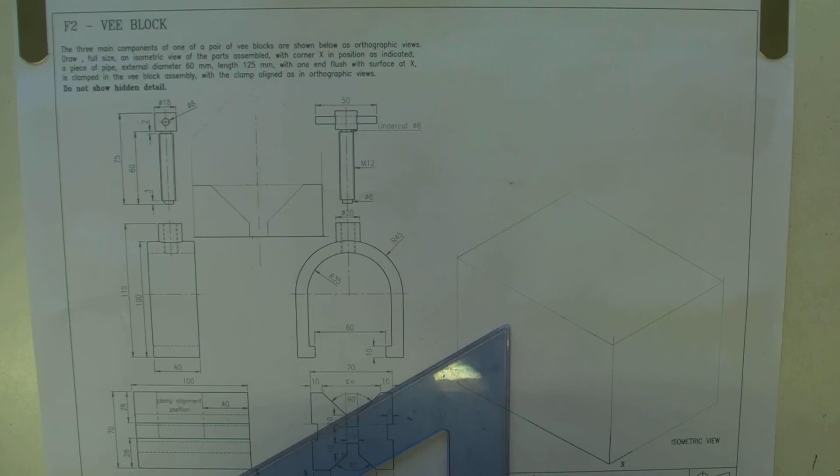Okay, so we've got the basic shape up. Next thing we're going to do is just draw in the profile here.

Now, because I've drawn this here, I can actually lift a few sizes from it, which makes a lot of sense to do. So I'm going to do that and just basically mark these on the side.

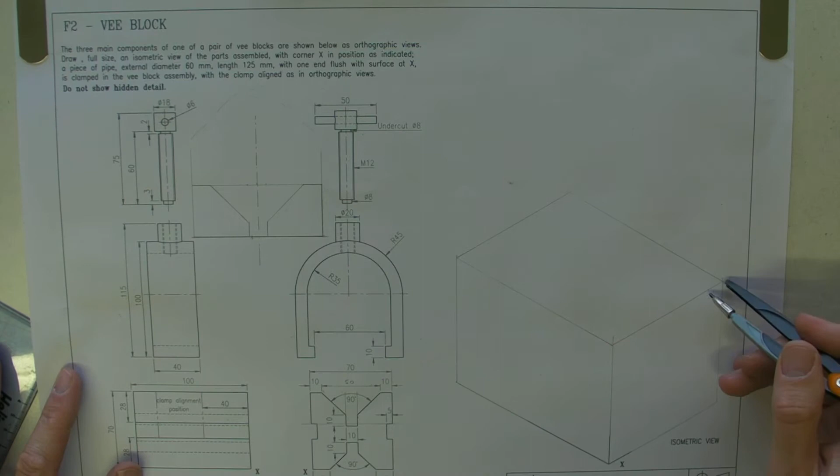So it's symmetrical, so mark that point there, mark that point there. I can mark how far down it is, measure there, mark that on.

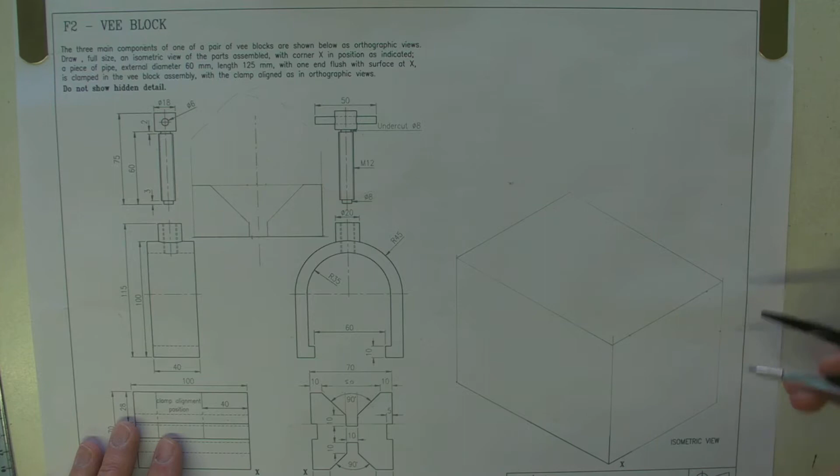And then we'll build this up as we go along.

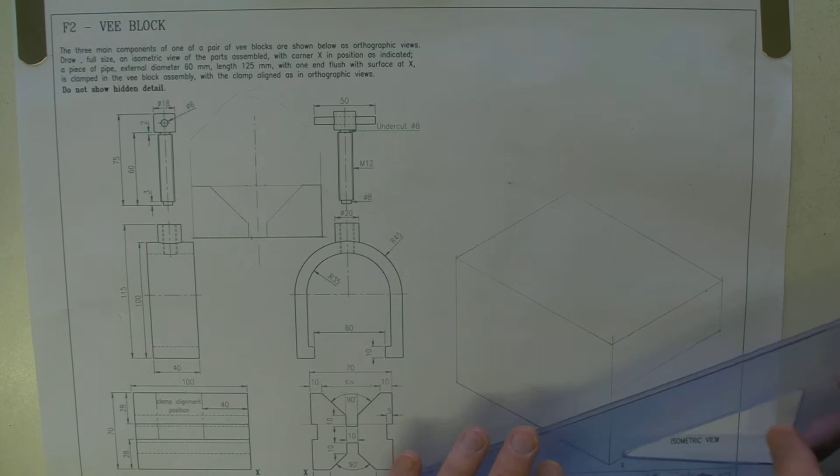And measure into this point. Marking that. Measure on the other side, should be the same, should be symmetrical.

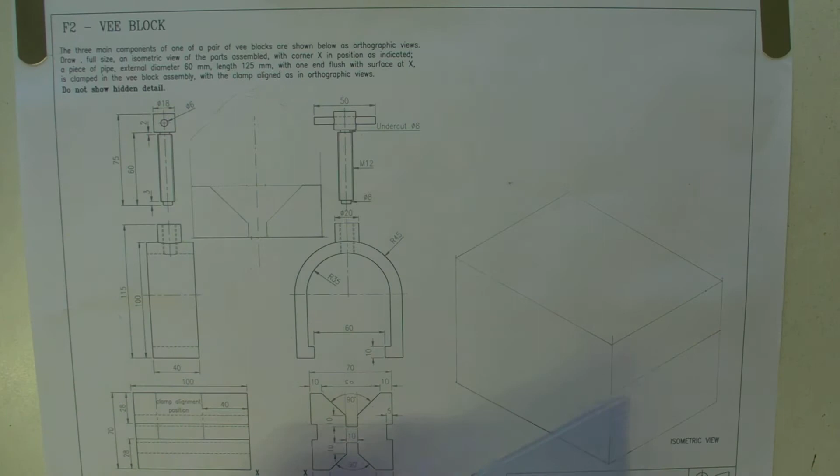Okay, so that then allows me to start to form this up.

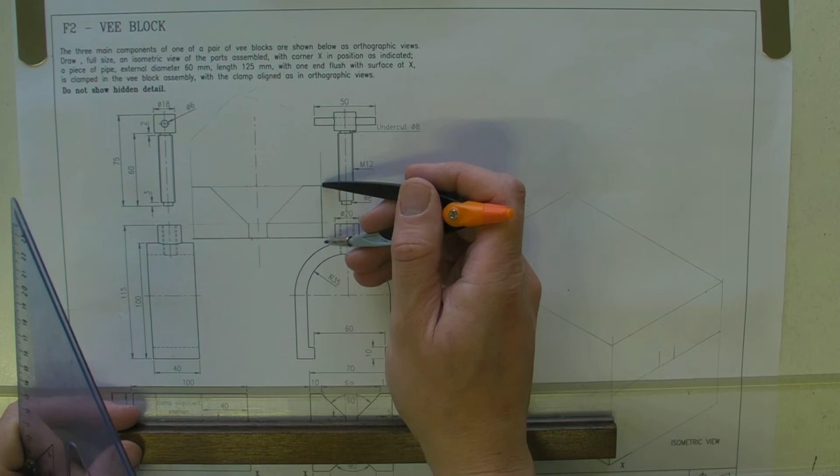I need to measure down to how far down this is, because I can't use my 45 set square on there, because it's isometric. So measure down there, mark that, and that allows me to build up what I need to build up.

And just draw in these points.

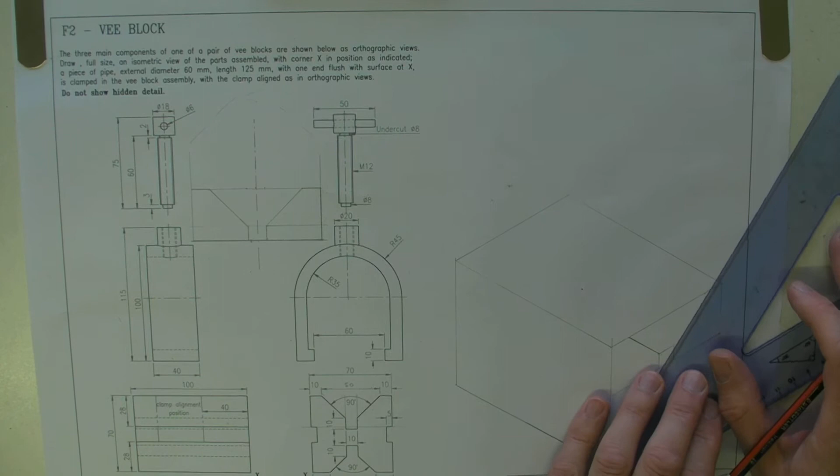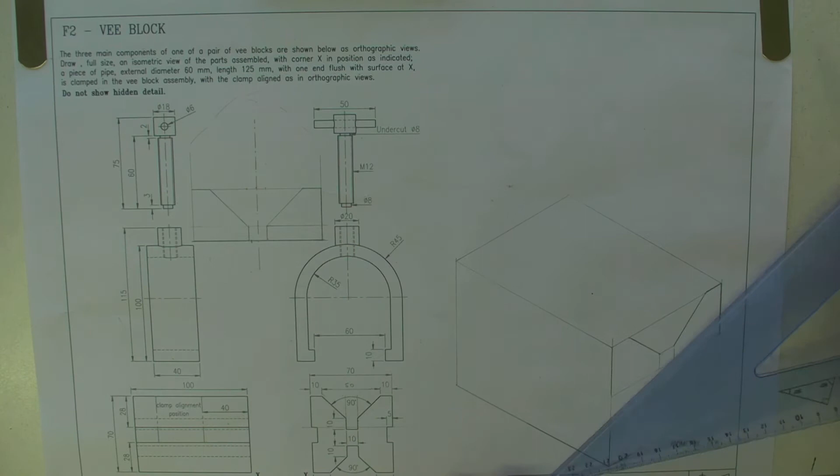Now I could have drawn all of the profile, and obviously I've only done half of it really, so I now need to rely on sizes to build up the rest of it, but that's fair enough, that's easy enough to do. So I'm just going to look at this here and just mark a few sizes on it.

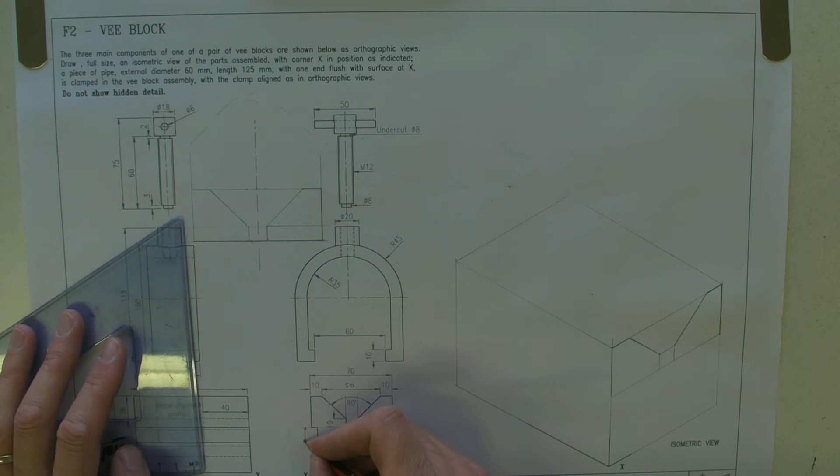We've got this distance here, this opening, which, if you look here, we've got 28 and 28 and 70 in total. The actual size isn't marked as such.

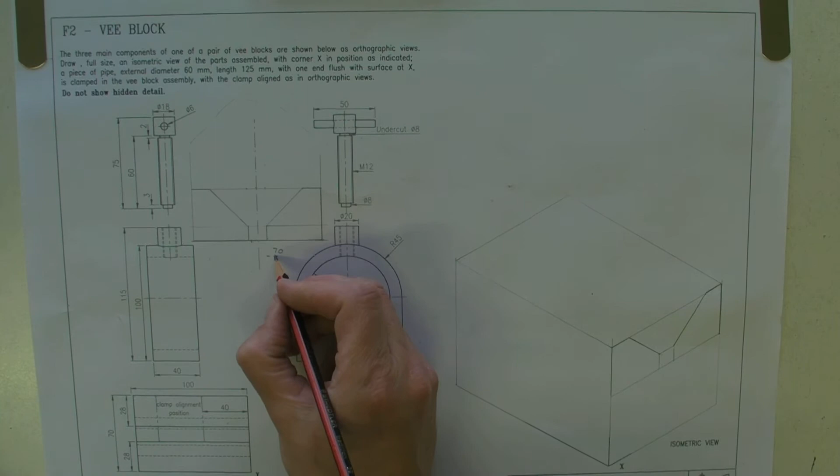So what we need to do is we have to work it out. So I mean, you can do your sums wherever you like, but it's 70 minus, well, 28 and 28 is 56. I guess you could do that in your head, but you might make a mistake, so you have to make sure you get it right. So that's 14. Okay, so the height of that bit there is 14.

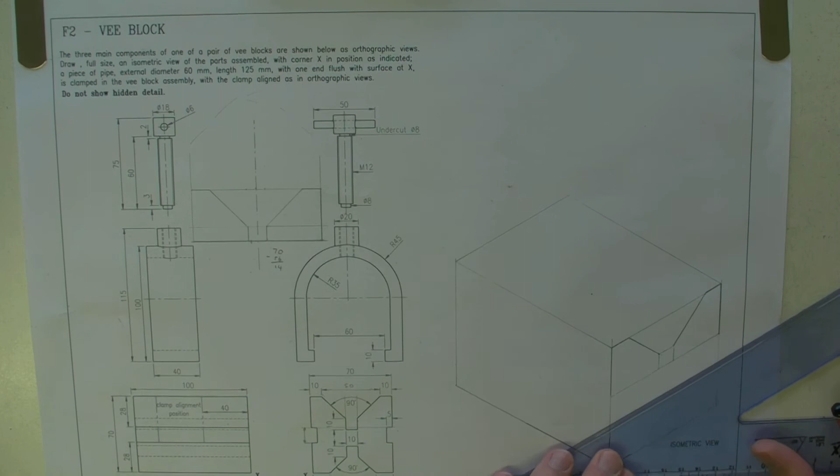So carefully measure 14 millimetres. Mark it. So that's the bottom of that slot there. So mark that all the way across.

This bit goes in, so just mark this in. Firm this in a wee bit just now. And I'm going to mark and project these points down because we're going to need them for the bottom half.

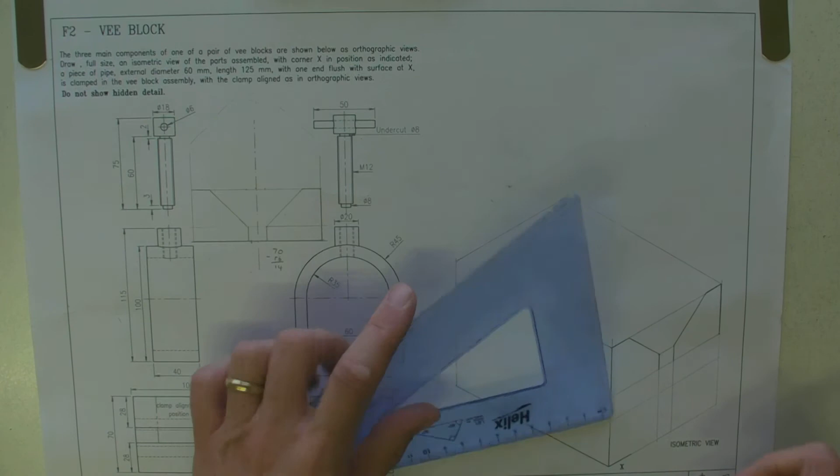Okay, and this comes down firmly, so firm that in. And same there.

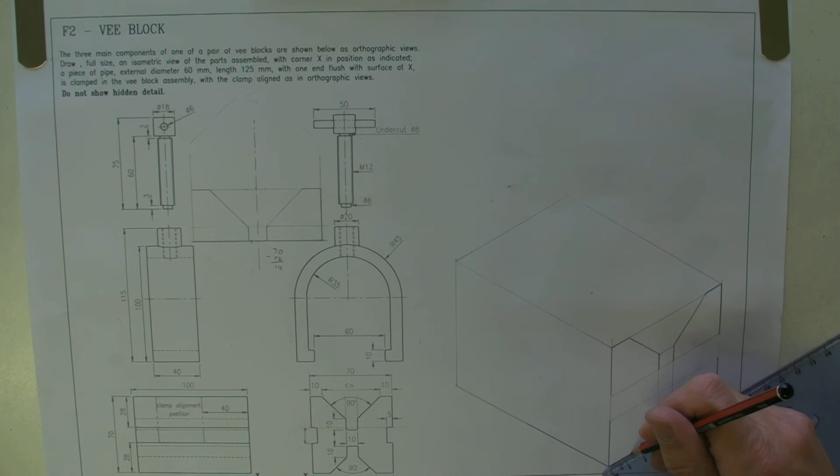Now, the sizes here, we've got 10 and 10, so measure 10 here, which is to the end of that line. And then 10 on the other side, 10 to there, got a couple of points there and there.

And then we've got to work out really how far up this height here is.

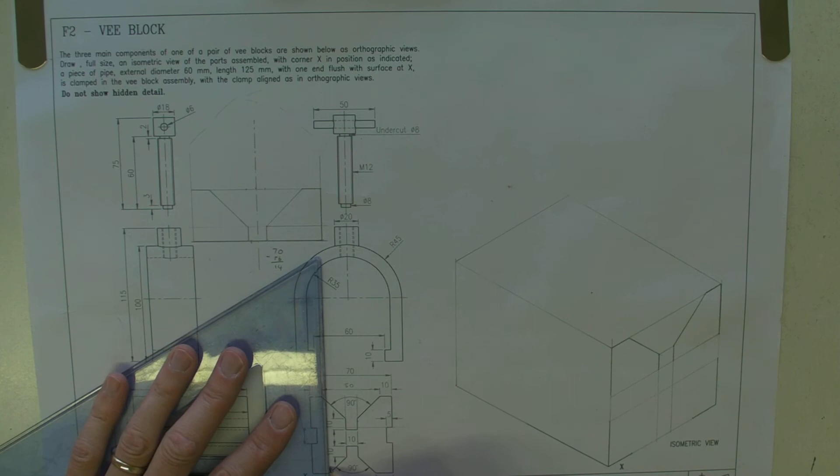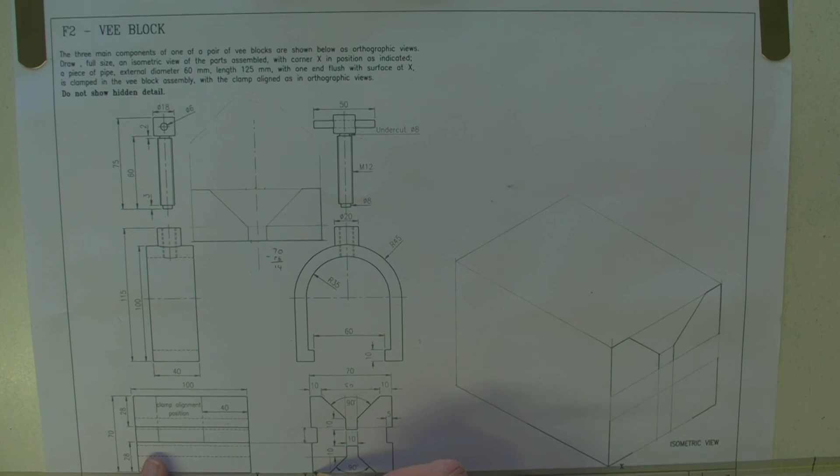So we know that that's 10 there, we know that that's 28 in total, if you compare it to there, it's 28 between here and here. Okay, so it's 28 in total to there.

That's 10 down from there, but how far is it down from there? Because that's not level with that, so we can't use that size.

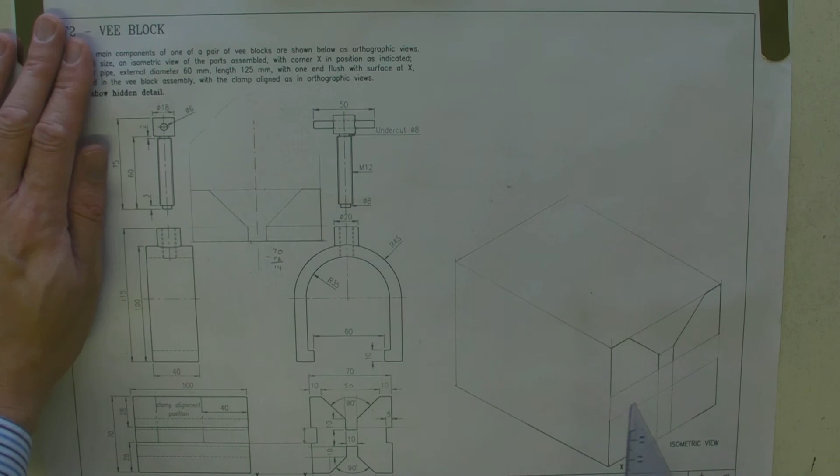So look at the overall height, and the overall height is 70. So what we need to do is just work out if that's 28 there, then we need to work out how far is it from there to there.